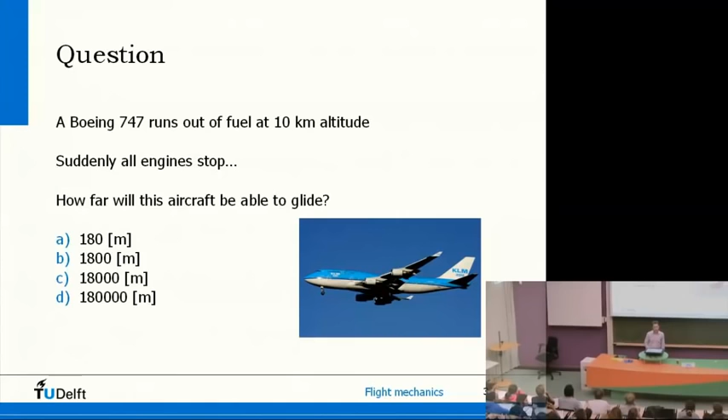Now of course you want to know what the correct answer is. I've made a picture: if this happens above Amsterdam, that circle is 180 kilometers, so answer D. That's what you can reach with this aircraft, so you can even fly almost to Brussels without engines operating.

Now, to come back to the lecture, this is typically a thing you'd like to calculate in flight mechanics. So this whole lecture is about aircraft performance: how far can you glide, like in the previous example, how fast can you fly, how slow can you fly, how high can you go, or if you want to fly from A to B, how much fuel do you need, or what's the furthest you can fly? These are typical questions you should be able to answer at the end of my lectures, hopefully, and that's for a given aircraft.

But I'll also talk a little about aircraft morphology. I'm not sure if you know what morphology means, but it's more or less related to the shape of the aircraft. So if you know how far you can glide, you can think, well, what if I change my aircraft design slightly? Would I then be able to glide further or not? So aircraft design, wingspan, etc., is really much related to aircraft performance.

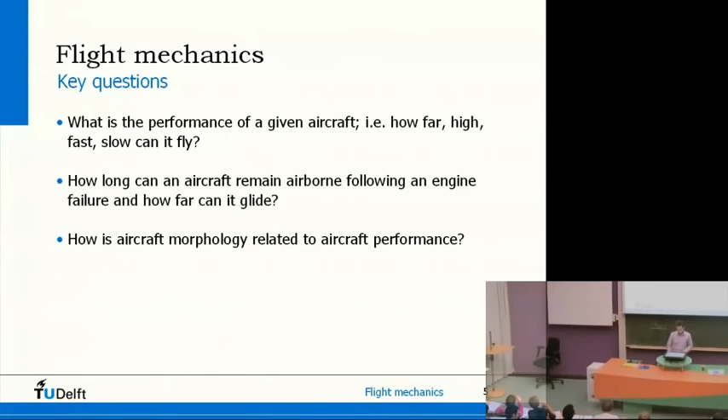So that's aircraft morphology. These are typical questions I'd like to answer, and it's important to realize that we try to analyze the performance of a complete vehicle. So it's not just aerodynamics, not just structures, not just propulsion. This deals with the whole vehicle, including the pilot, the atmosphere, and so on. So you can look at all these types of aircraft and do calculations about them.

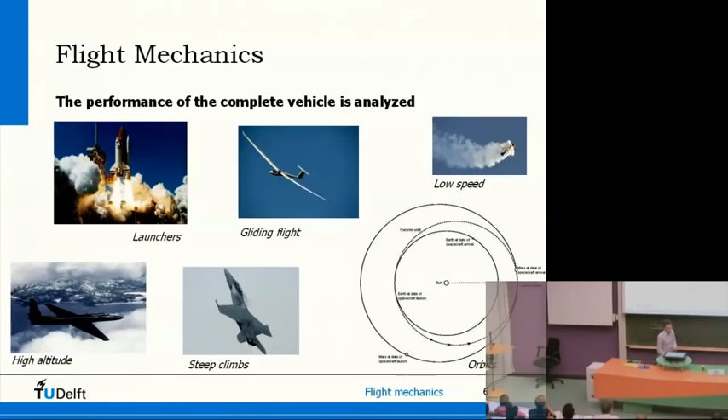And then next year there's a course on flight and orbital mechanics, where you'll even start doing calculations about orbits and space flight. I won't be telling you that because I don't know anything about space, so in this lecture series it will be only about aircraft. So we're trying to analyze the performance of the complete vehicle.

And of course, if you want to know how far it can glide or fly, you have to be able to describe the motion of the aircraft as a whole. This is why basically the center of my lecture series is about the equations of motion of an aircraft. So that's basically F equals M times A. This is what we're basically going to do, so it's not more than high school physics, really.

But of course, the forces determine the acceleration of the aircraft and thus the motion, so you have to understand all the forces that act on the aircraft. This includes propulsion, aerodynamics, the aircraft structure, in the sense that the structure will have a certain weight, and you can imagine a heavy aircraft might perform less well than a lighter one. The pilot also has an influence: the pilot can decide whether to fly high in the atmosphere or low, or what kind of strategy to use.

So this will also influence the performance. And finally, the atmosphere. Of course, at high altitude or low altitude, you have different air density, different temperature, and these parameters affect the equations of motion and thus the performance of the vehicle.

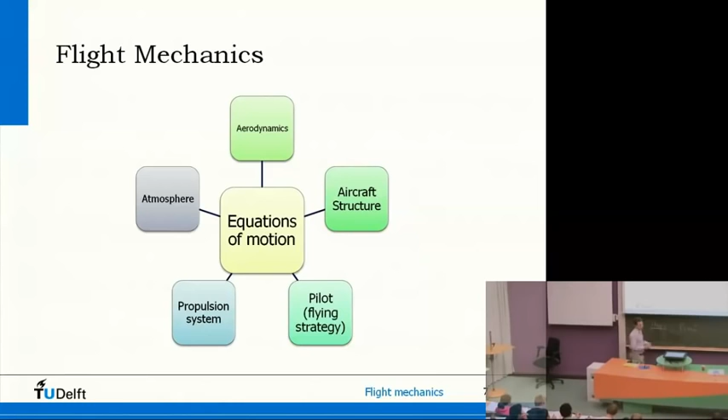So this is more or less what this whole lecture series is about. So hopefully you know now what flight mechanics is, more or less.

And before I go into details of this course, just some practical matters like what book do you need, which chapters do you need to learn. And after that I'm going to treat three things basically.

The general equations of motion, so point number 3, that's what you really should be able to do after this lecture. Points 4 and 5, propulsion and aerodynamics. They partly cover what you already know a little bit, but I'm going to extract what you know already to be able to apply it to the equations of motion.

Finally, a summary and some additional stuff for the interested reader.

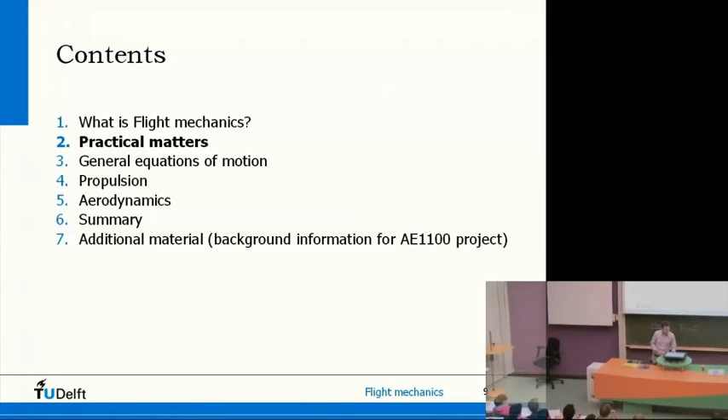So this is what I'm going to do. First lecture is more a general lecture, introduction, deriving equations of motion. And that's the tool really that we're going to use to solve all the questions that we may pose.

After that, I'm going to look at horizontal flight performance. So performance questions like how slow, how fast can I fly, what's the maximum distance I can fly if I stay at a constant altitude.

After that, it's going to be a little bit more involved. I'm going to treat climbing and descending flight, so the example I've just given, but also maybe if I want to climb to my cruise altitude, how fast, how much time does it take before I get there?

And finally, fourth lecture is the flight envelope. And the flight envelope is basically a diagram which more or less looks like this, with altitude and airspeed, and there will be some region in this flight envelope where a certain aircraft can fly.

So there will be maximum speed limits, maximum altitude, minimum speed limits. And within that region you can fly, and that's really important to the person that's operating the aircraft, because then you know what you can do with your aircraft. So this really tells you what the aircraft is able to do.

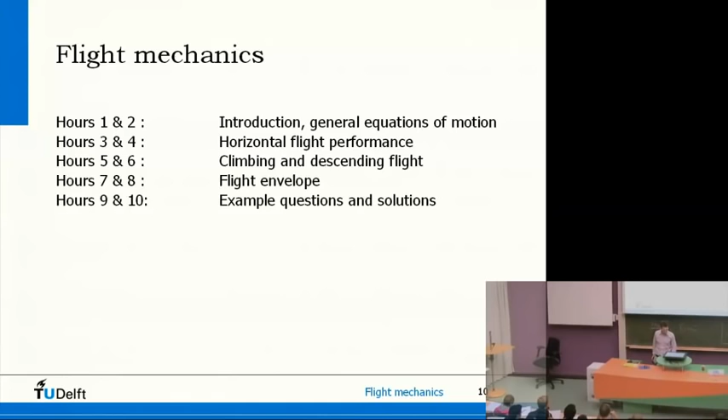Now, what do you have to learn? You have to learn the lecture sheets. If you understand the sheets that I show you in this lecture, then you know pretty much everything there is to know. There will be practice questions from previous exams on Blackboard, so you'll be able to look at them.

So you can use it as background reading, but if you understand the sheets and you make some notes during this lecture, then you should have everything you need to know.

There's also another book you could buy. It's only 14 euros. It's called Elements of Airplane Performance. It's not a waste of money because next year you'll need it anyway, so you might consider buying that. But that's up to you.

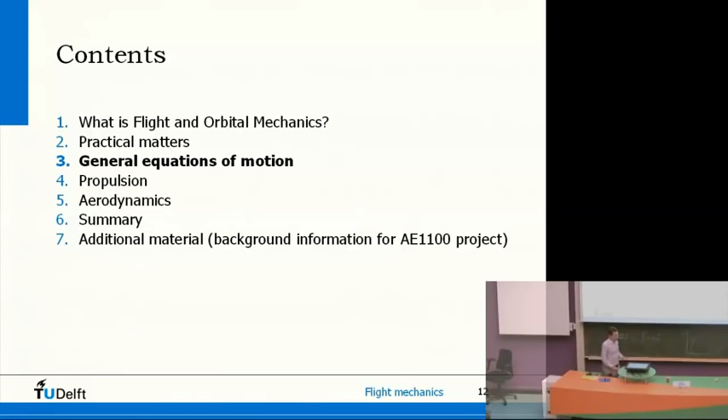I'm going to do that in a couple of steps. I'm going to talk a little bit about Newton's laws, stuff you should really already know. I'm going to talk about coordinate systems. You can imagine if an aircraft is flying through the sky, you need to define some axis systems to specify what the orientation of the plane is. Then I'm going to talk about some assumptions, to make life a little bit easier, and then we'll derive equations of motion.

Now to start with Newton's laws, this equation really only holds when you're in an inertial frame of reference. And what does that mean? That's a frame of reference, a coordinate system with axes, which is fixed in space and not moving at all. It's completely at rest.

Now, a coordinate system which is translating at a constant speed, you can prove that that's also an inertial frame of reference. To give you an example, let's say you were in a train and all the curtains are closed and the train is going at a constant speed, then except for some vibrations maybe, you don't notice at all that you're moving. So you can jump in the train and you'll land in the same spot. So that's in fact an inertial frame of reference, and the equations of motion there hold.

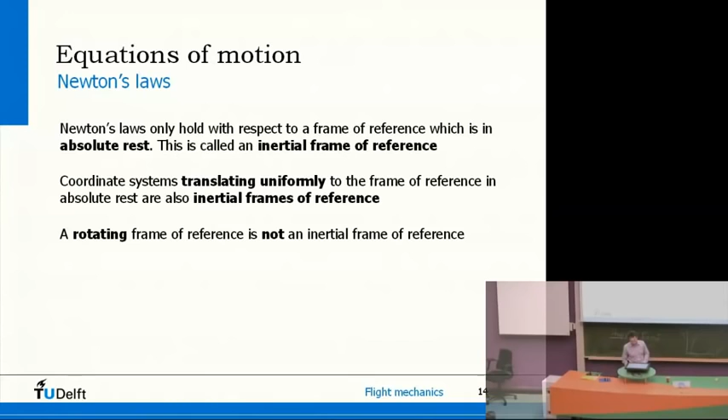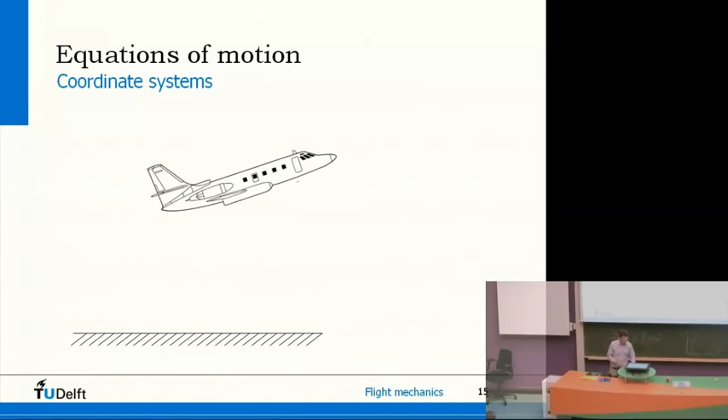Coordinate systems: there are various coordinate systems you can describe. One that's really relevant and obvious is an axis system fixed to the Earth, like here. This is what we call the Earth axis system. Out of convention, you can choose whatever direction the x-axis is located. It doesn't really matter a lot for your calculations if the aircraft is flying in that direction or another. So the x-axis, you're free to choose which direction it is.

The z-axis here is pointing to the center of the Earth. Now that's just an agreement, you could have chosen it the other way. This is the way it is, and it's completely fixed. So this system is fixed to the Earth, it's not moving.

Now, of course, the plane is moving around. So you could also say, I take this Earth axis system, the same orientation as the one fixed to the Earth, but now I fix it to the plane. So this is what we call a moving Earth axis system. It's the same axis system, same orientation, just traveling along with the plane. And that's quite convenient.

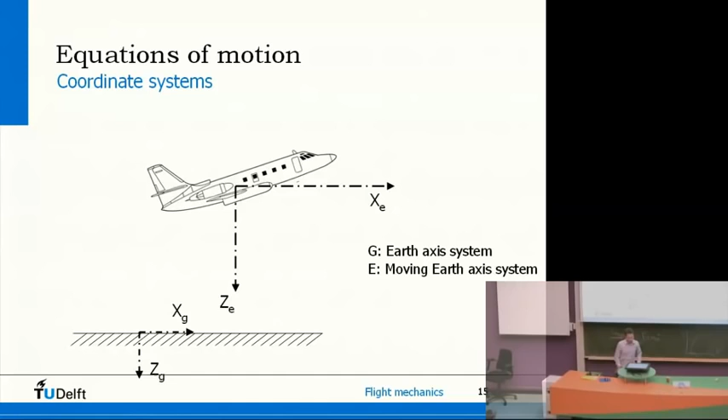Now, once you have this, you can imagine there will be other axis systems, because a plane is not always in a horizontal attitude. So we can also define what is called a body axis system. The body axis system is fixed to the plane, and the x-axis points through the nose of the aircraft. So you can see straight away that there's an angle called theta.

Let's see if this works. Oh. I'm not very good at these things.

Well, that doesn't work. So there's an angle theta between the moving Earth axis system and the body axis system. The important thing to realize is that's basically the angle between the nose of the aircraft and the horizon. So that means the pilot, if he or she looks outside the window, is actually seeing that angle theta, which is quite relevant from the pilot's perspective. Now again, the z-axis is just... why is that thing moving?

The z-axis is just perpendicular to the x-axis. Then, of course, and this is quite important to realize, there is something called the airspeed vector. And that vector indicates in which direction the plane is going. And that's interesting, because that determines the performance, where you're going.

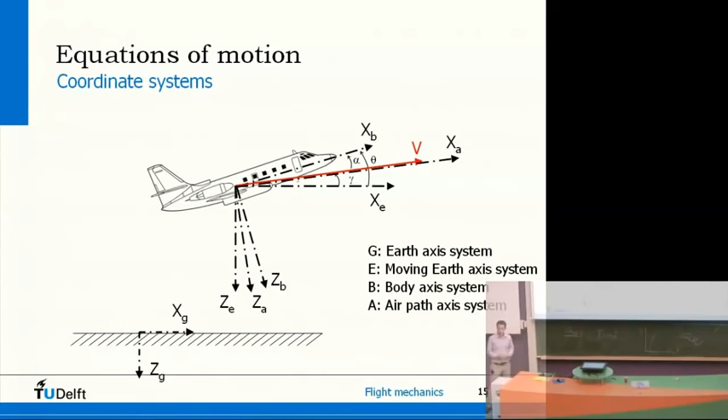And then finally, we can define an axis system, which is called the air path axis system. And this axis system is in the same direction as the airspeed vector. So we basically have three axis systems fixed to the plane and three angles describing the differences between the three axis systems.

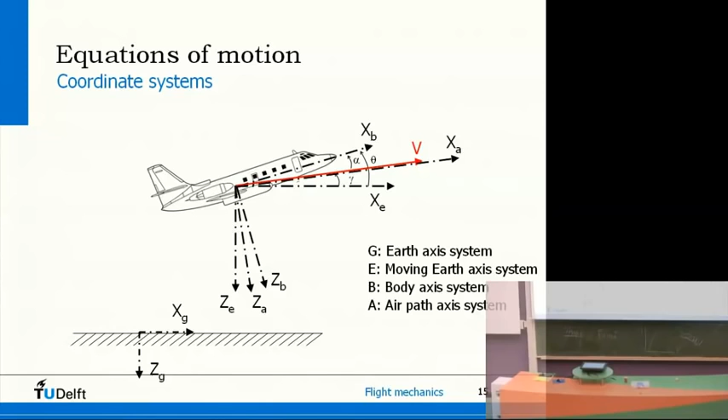Okay, so these are the coordinate systems we have. Now, these angles: theta is called pitch attitude, alpha is called angle of attack, and gamma is the flight path angle. And these angles, at least theta and gamma, they are called differently in the book Introduction to Flight. But all the other books use these notations, so that's why I'm using these as well, to avoid confusion.

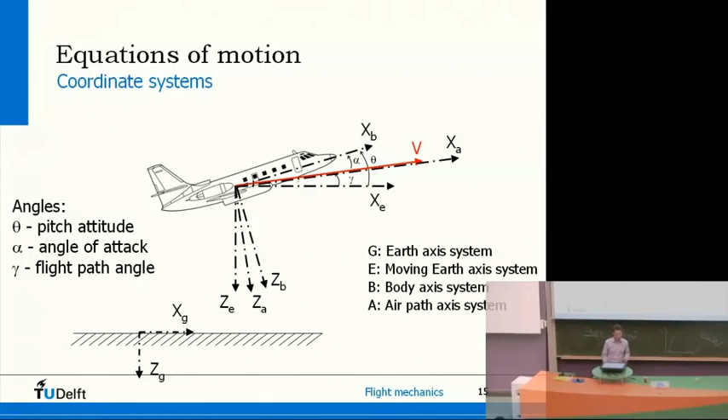Now we have all the relevant angles. And before I start deriving these equations of motion, just a few assumptions I'd like to emphasize first. The first one I assume is that the Earth is flat. Now you can see that if you would stay at a constant altitude like so, then if you fly long enough, you're actually flying around in a circle around the Earth. Now, in order to achieve a circular motion, you need a centrifugal force.

And what I'm going to assume is that the Earth is flat. And just a little calculation to show you that that is relevant. Now, the centrifugal force is basically this.

mv squared over r. Now, if you look at the top equation, in our case, m is actually the weight of the aircraft in newtons divided by the gravitational acceleration. V squared is simply how fast the plane is flying. And r, in this case, is the radius of the Earth plus the altitude of the plane above the Earth's surface. So this centrifugal force is what we call C.

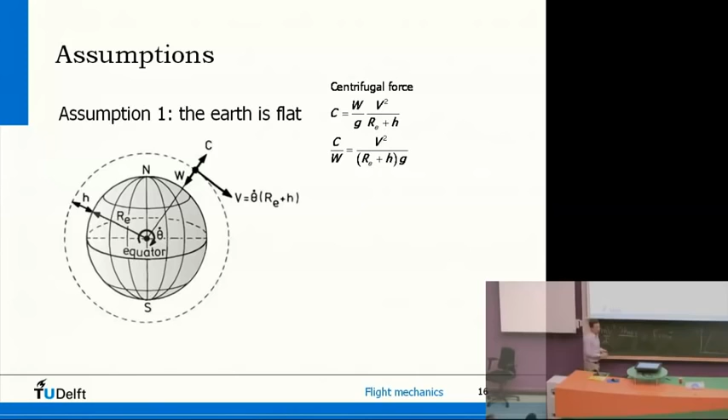Now in the second equation here, I'm showing you the relation between centrifugal force and aircraft weight, because then I can express it kind of like a percentage. And if you know the percentage, then you can say whether it's a relevant assumption to neglect this.

Now, just some numbers. This is an example. V is 100 meters per second. You can calculate how many kilometers per hour it is, but it's approximately Mach 0.3, so it's fairly slowly flying. Radius of the Earth is given. Let's say we're at 0 meters altitude. And then you can see that in this case, C divided by W is 0.00016, so 0.016%. So that's really negligible, and you can leave this out of the equation.

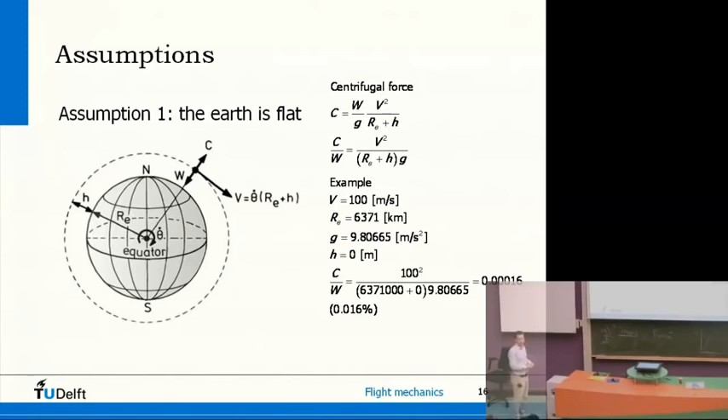Of course, if you would start flying really fast, like hypersonic flight, or maybe you start flying really high, almost into space, then this isn't negligible anymore. But the types of aircraft I'm talking about in this lecture, they fly up to 10 kilometers. They may fly supersonic, but not a whole lot. So this is really quite a good assumption.

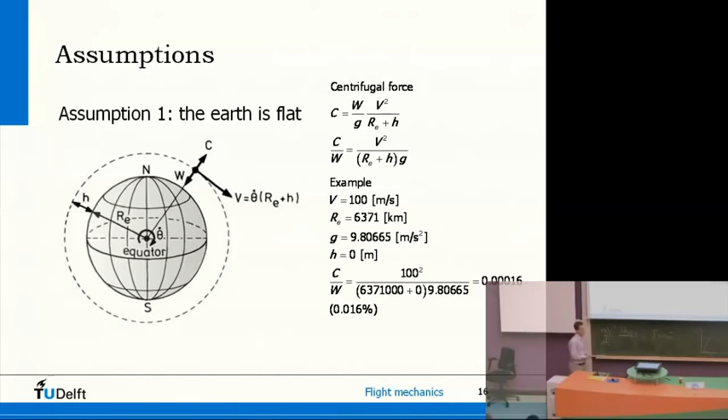Now, another assumption that I'm making is that the Earth is basically not rotating, because there are a couple of effects actually that happen if the Earth is rotating.

You can imagine if you're somewhere over here at the equator and you would move upwards, on the equator you're turning around quite fast if you just stand. And if you walk along the Earth's surface toward the north, that rotational speed becomes less.

It's kind of comparable to one of these discos where you have a dancing floor that turns around. If you're in the center and this thing is rotating, and you'd walk outside, you'd feel that the speed is increasing and you'd feel a force. So these forces are present if you consider the rotation of the Earth. That's a relevant thing, and it's actually something you can measure.

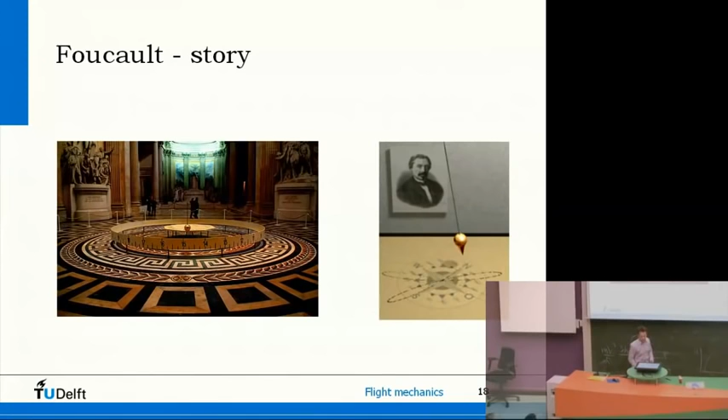In fact, this is how they proved a while ago that the Earth was rotating. Now, it takes a long time—a day before the whole cycle is complete. So you can imagine that these forces are quite small, and we can actually neglect them now. But it is something you have to pay attention to next year if you start looking at orbital mechanics and spaceflight.

Final assumption: I'm going to assume that gravitational acceleration is zero—sorry, constant. And that's in fact not completely true. If you go into space and a mass is further away from the Earth, it experiences gravity to a lesser extent. So gravity is not constant, but if you consider normal aircraft flight up to say 80 kilometers, gravitational acceleration is almost the same as at sea level. So that's a fairly relevant assumption.

Final assumption I'm making is that I'm going to treat the aircraft like a point mass—like a little ball, basically—and I'm going to see what kind of motion it will make. So these are the basic assumptions.

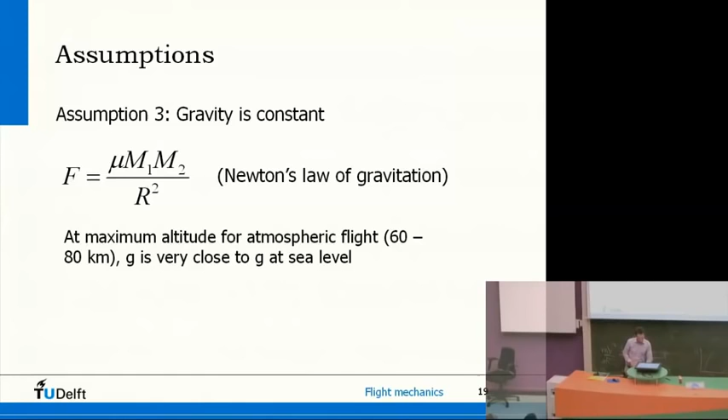Now back to our equations of motion. This is the picture I just made before. What I'm going to do now is make a free body diagram with all the forces, and a kinetic diagram with all the accelerations of the plane. Combining those will give us the equations of motion.

Let's just list which kind of forces are actually acting on the plane. Clearly there's aircraft weight, and you can imagine aircraft weight is always pointing towards the center of the Earth, so that's in the same direction as the z-axis of the moving Earth axis system. You can see straight away that these axis systems will become relevant right now. Aircraft weight, that's quite obvious, I guess.

But now let's have a look at the lift vector. Lift is by definition always perpendicular to the airspeed vector. That's something to pay attention to, because in most courses you just consider horizontal flight, and then lift is pointing upwards. But you could imagine if you're flying straight up with a fighter aircraft, then lift is actually pointing in that way. So lift is perpendicular to the airspeed, by definition, in this air path axis system—in the XA and ZA axis system.

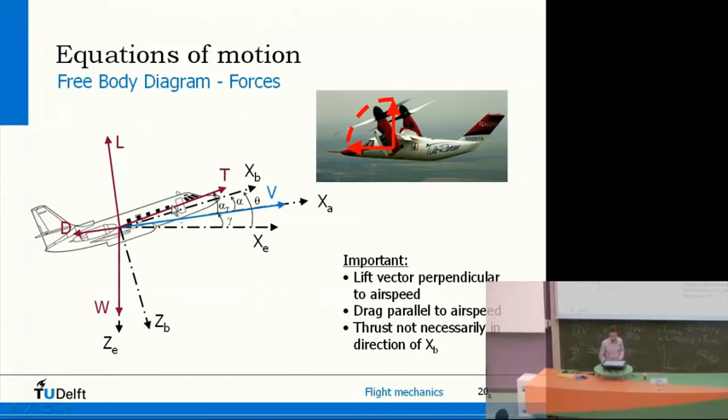So you see, we have all the forces now. Before the break, we can have a look at the accelerations as well. So the same diagram, but now we're going to look at the accelerations of the aircraft. If you can just have your attention for a few more minutes.

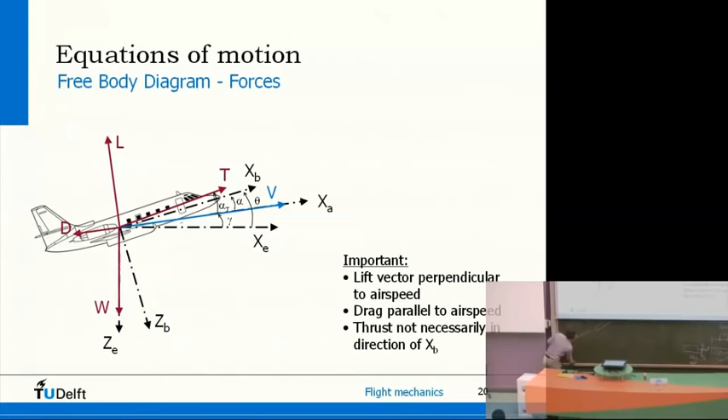There is, well, the y-axis is in fact pointing outside the board, but L is perpendicular to the airspeed vector. So, maybe I... it's basically like this. So by definition, it's okay.

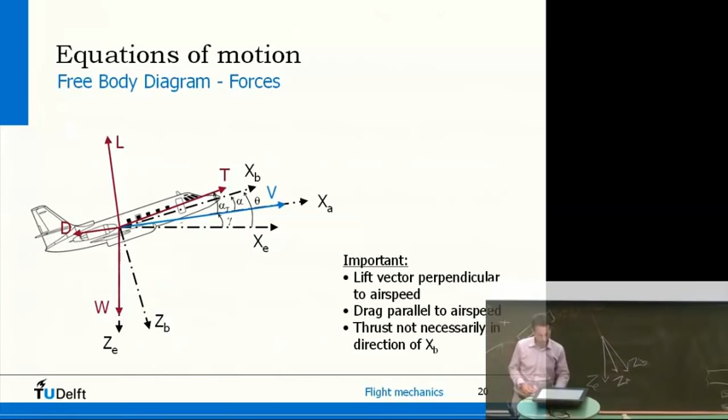Then back to the accelerations, and we're almost at where we want to be. That's the equations of motion. So I've taken forces parallel and perpendicular to the airspeed, and I'm also going to take accelerations in these two directions. Now, you can say that the airspeed may increase or decrease with time, so you may have a change of airspeed with time in the direction of v. That's a fairly simple acceleration. So if you complete the equation of motion here, you'd have mass, aircraft weight divided by gravity, times dv/dt. Now there may also be some kind of a vertical acceleration.

And you know that if you have an acceleration perpendicular to the speed vector, then you will start to go in a circular motion. Basically, if you're in a car and you're driving straight and you make a force to the right, then you start to go in a turn to the right, really simply. So you can imagine there may also be a vertical acceleration of the plane, and such a vertical acceleration will make the plane go in a circular motion like this.

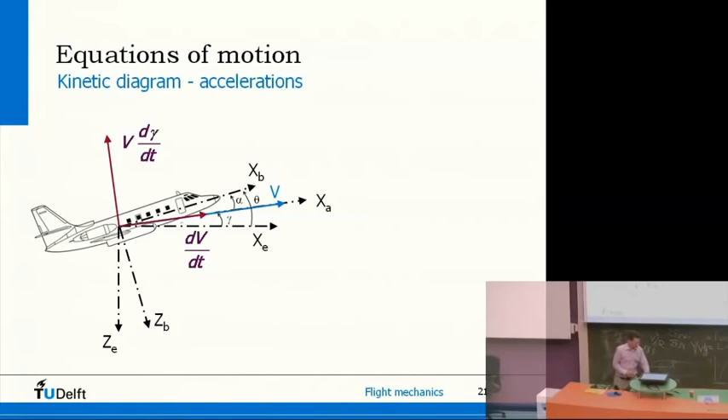So the equations of motion then become this. So we have a vertical acceleration times the mass, and then we end up with these two equations. So we have one plane, it's able to move in two directions, two-dimensional space. We're treating it basically like one mass which is moving around. So we end up with two equations of motion that describe what the aircraft is doing.

So that's all for this hour. In the next hour I'm going to look at what are actually all the forces in these equations and how do they behave.

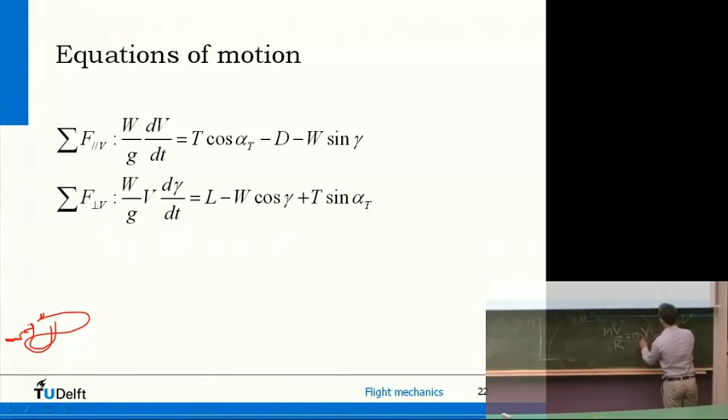is V. And if you would look at the traditional centrifugal acceleration, which is mv squared over R, and I put this in the equation, so I replace one of the v's with d gamma dt R, I get R divided by R. So this is the same as mv d gamma dt. So I hope it's a bit clearer, but that's basically what you see on the left hand side in the second equation. So it's the centrifugal acceleration, but the only reason I write it down like this, without the radius, is because I already have a flight path angle in the equation, so I don't want to add another variable, which is the radius.

So much for equations of motion. Now, you've seen in these equations of motion, there are a couple of forces that are quite important. There's the thrust, there's the lift, drag, and the aircraft weight. Those are the four basic forces. Now, aircraft weight in the things I discuss is more or less constant. Of course, if you burn fuel, then an aircraft may become lighter. In fact, if you fly for 8 hours on the way to China, then aircraft weight might actually reduce by about 40%. But in this lecture, I'm not going to treat that.

Most important forces to discuss are propulsion and aerodynamics. So these are the two topics I'd like to discuss in this hour. And what you see in these equations is I'm talking about real thrust, real drag, real lift. So not a lift coefficient, not a drag coefficient. I really want to know what these forces are.

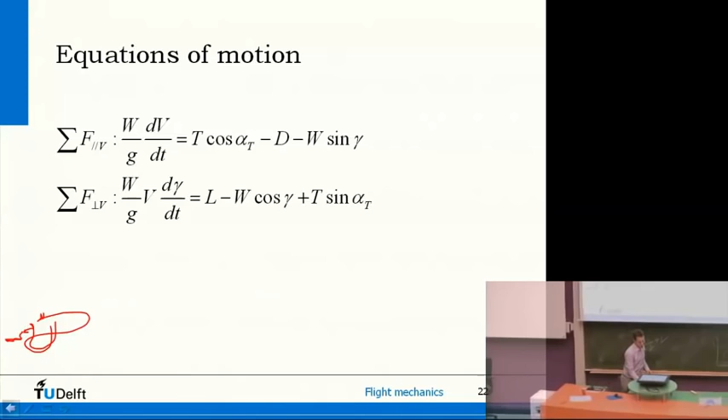I'm going to look at some equations you should already have seen in this lecture or in previous lectures of Introduction to Aerospace Engineering. But I'm going to change them a little bit and highlight what you need for this lecture. Some of the things you've already seen, but it's just a refresher, changed to apply it in the equations of motion.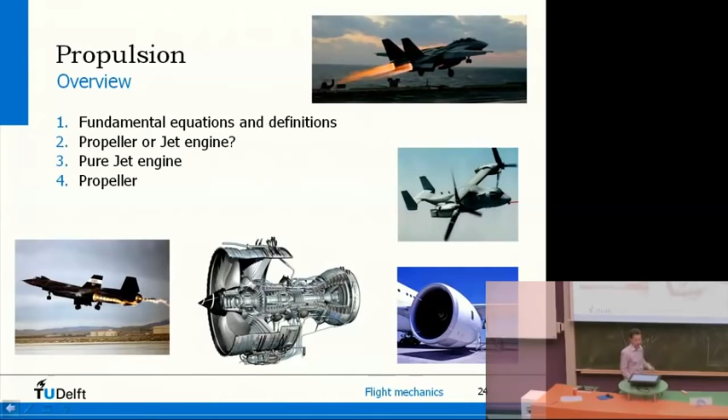The most fundamental thing is to realize that if you have a propulsion system, no matter which one you have, they all work in the same way. They all somehow take a bit of air and accelerate it. By accelerating air, you create a force through the momentum equation. Basically, the momentum of the mass flow of the air at the exit of the engine compared to the momentum at the entrance - the difference between the two is the force that is created.

One important thing here is that when I talk about mass, it's actually a mass flow, so the units are kilograms per second. I could have put a dot on top of it, but it's a mass flow. I is, well maybe in Dutch you'd call it impulse, but in English it's momentum - so it's mass flow multiplied with V. Momentum would be mass times v, and the derivative with time is what you have here.

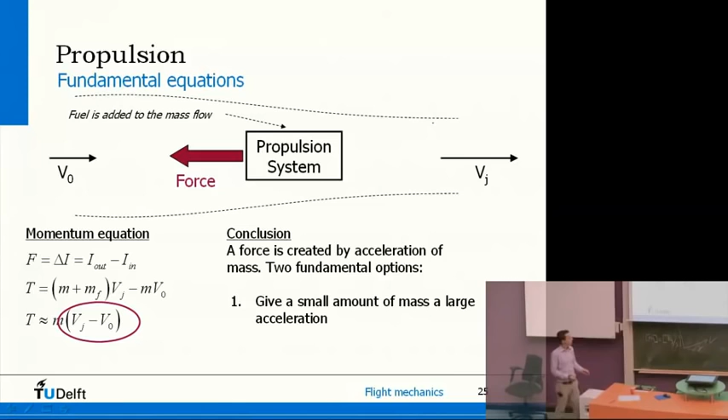So really two variables you have, because V0 is the speed at which you're flying. If you design a propulsion system, you can play with this jet velocity or with the mass flow of the air. So you have two options to create the same amount of thrust. You could take a little bit of air and accelerate it a lot - playing with the jet velocity. Or you could take a lot of air and give it a little push, and get the same amount of thrust. So you can take a lot of mass with little acceleration, or a little mass with a large acceleration, or anything in between. That's really the difference between all these types of propulsion systems - important to keep in the back of your head.

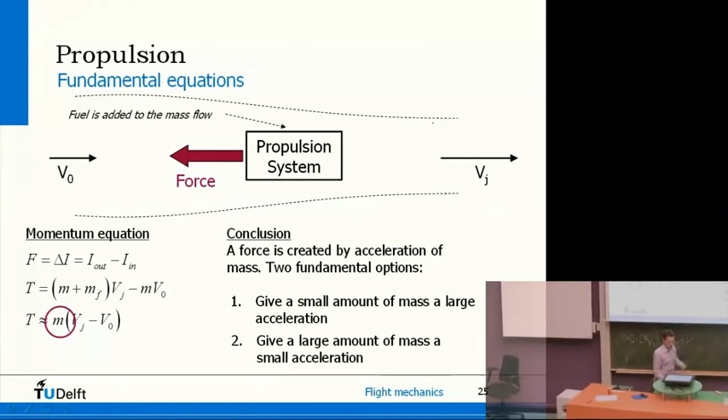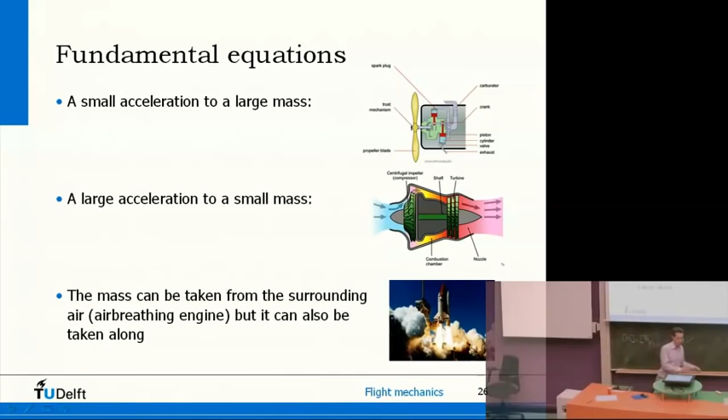Just to give you some examples: on top you see a propeller with a simple combustion engine like in general aviation aircraft, and that propeller is actually accelerating a large mass of air just a little bit. Compare that to a jet engine - you know a jet engine makes a lot of noise, and that's basically because the air at the exit has a very large velocity. So a jet engine gives a very large acceleration to a relatively small mass of air. Finally, not really the topic of this lecture, but you could also take the mass with you in a rocket, and then you can also create a force.

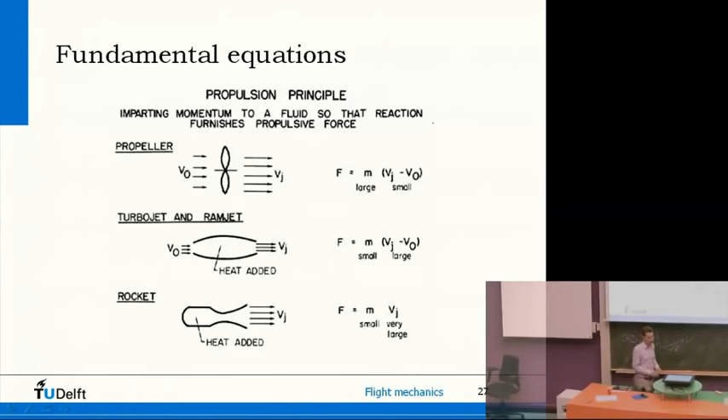So, if you look back at the equation, for the propeller you have large mass flow, small speed difference, and for the jet you have a small mass flow and a relatively large speed difference.

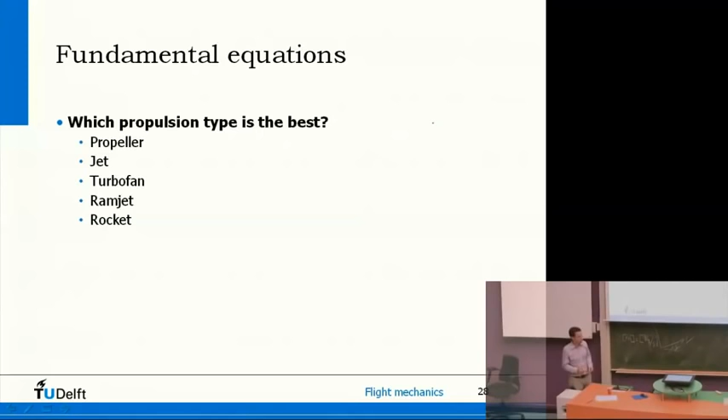But then you might wonder, which propulsion type is actually the best? A propeller, maybe a pure jet like you have on fighter aircraft, maybe a turbofan, which is a bit in between a pure jet and a propeller like you see in civil aircraft, maybe a ramjet, that's more a special case, or a rocket.

But before you can answer that question, you have to say, if you want to define what's best, we have to define what do I mean with best? Do I mean a lot of thrust or a very efficient engine? So we have to make some definitions first before we can compare different types of engines.

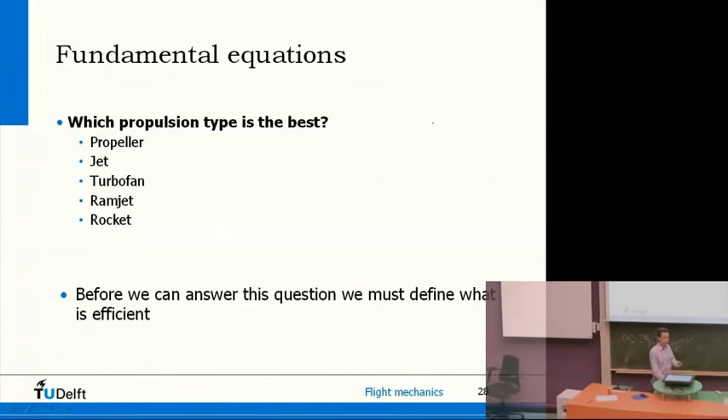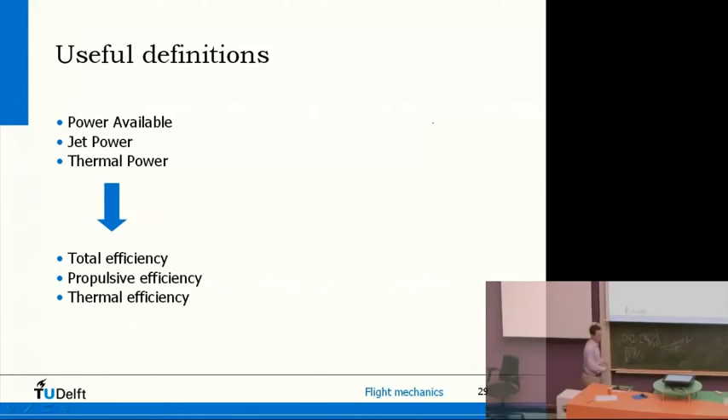So we're going to look at two definitions. We're going to look at power, basically energy per second, and we're going to look at efficiency, which we express in terms of a percentage. We're going to look at a couple of powers, and I think 2 out of the 3 you've already seen, and a couple of efficiencies. With these efficiencies, we'll be able to compare different engines.

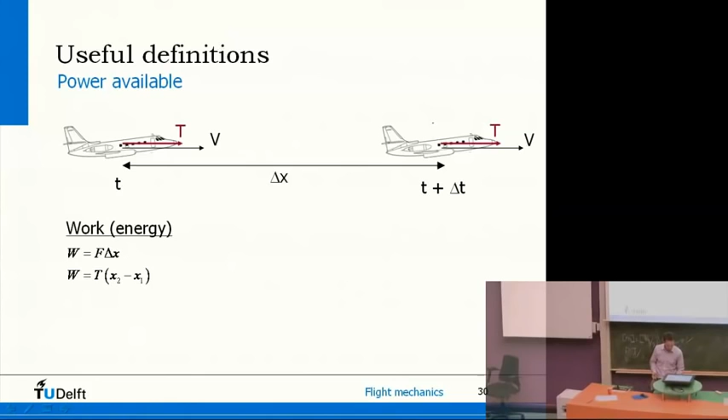Now, I'm not really interested in the energy. I want to know what is the power that I need. And power is energy per second. Was it a bit too loud? I can talk softly as well. So, energy per second, very simple.

Power then is work divided, so energy divided by the amount of time that it takes. Now, you have thrust times delta x, which is the work, the energy, and you have time delta t, and you can see straight away delta x over delta t. If you make the delta small enough, you'll get the change of distance with time, which is airspeed. So this power is what we call power available, because it allows us to go from A to B, the power you have for transportation. So this is the most interesting thing. Power available is thrust times velocity.

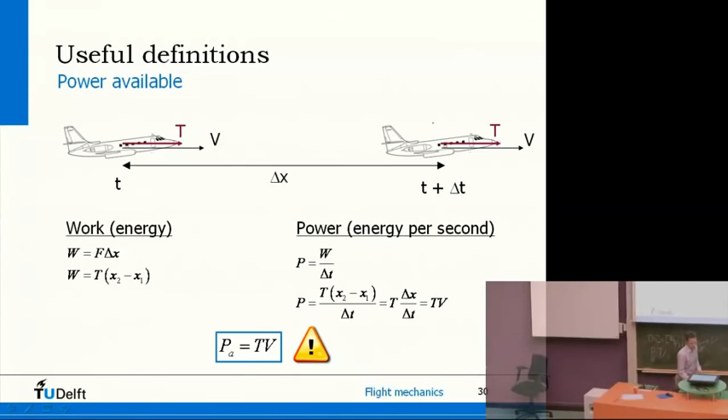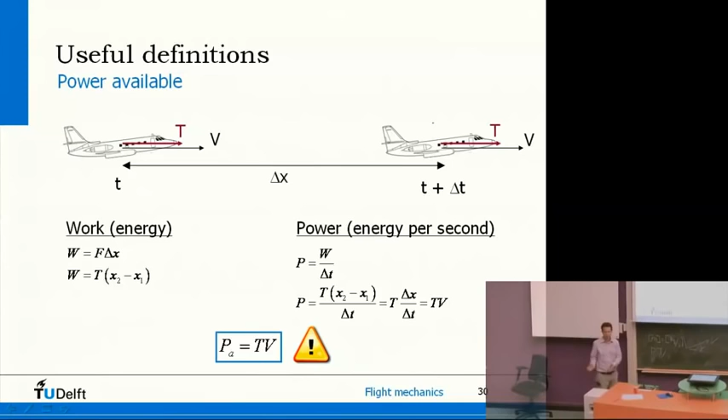Of course, there are some other powers you can define, because remember we're accelerating mass in order to get a thrust force. So you can imagine that there is a change in the kinetic energy of the air. So we can also define something called jet power, and that's basically the change of kinetic energy of the flow. If you look at the front of the engine, kinetic energy would be half m v squared, and at the end of the engine it will be half m vj squared. Now, as I said before, m is kilograms per second, so m there is a mass flow, so that's basically energy per second you see there. So it's a change of kinetic energy per second. Pretty straightforward, and that's what we call jet power.

Now that's an important one, because you can imagine that after the plane has passed, the air is moving backwards. You've accelerated it, so you're losing energy in the air, and that will basically affect the performance.

Was there a question? You can use, yeah, still working. Was there a question? No?

Now, of course, I've talked about jet power, so energy left in the air. I've talked about power to go from A to B, that's the interesting part for the person flying it. But of course, this energy has to come from somewhere, and it comes, of course, from the fuel, from burning fuel.

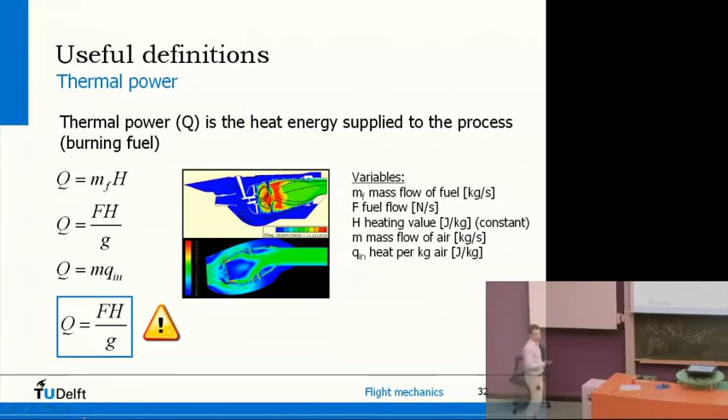But now let's have a look at efficiency. I'm going to define total efficiency as power available divided by thermal power. Because power available is that power related to flying from A to B, and Q, thermal power, is basically the amount of fuel you need. So this total efficiency just tells you, okay, if I go from A to B, I need a certain amount of fuel, and it tells you how efficient you transfer the fuel into transportation.

Now, you can understand that if you take jet power divided by jet power, that's equal to 1. So in the second equation, I've multiplied total efficiency with 1, jet power divided by jet power, and then I've rewritten it slightly: power available divided by jet power multiplied with jet power divided by thermal power.

And if I do that, then I can make a distinction in efficiency. I can say, well, total efficiency is then power available divided by jet power, which is something we call propulsive efficiency, multiplied with jet power divided by thermal power, which we call thermal efficiency. So I just made a distinction between two efficiencies.

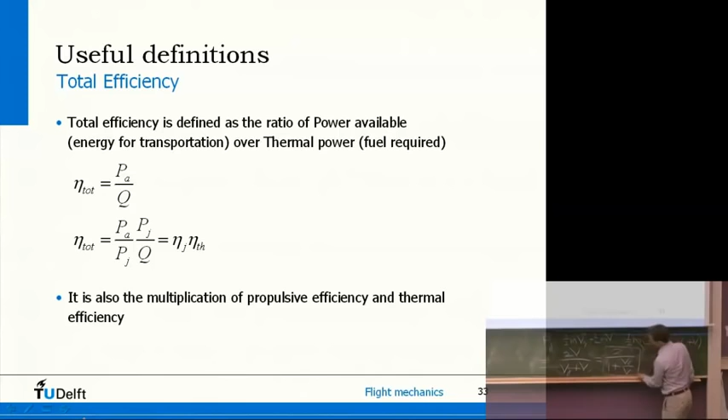Now, clearly these masses disappear. Now I have here Vj minus V, Vj minus V, so these two terms disappear. So I end up with propulsive efficiency being, I hope it's readable, 2V divided by Vj plus V, and I can also write this as 2 divided by 1 plus Vj over V - in this final step, I'm dividing the top and the bottom by V. So this is an expression for the propulsive efficiency, just a function of jet velocity and the speed at which the aircraft is flying.

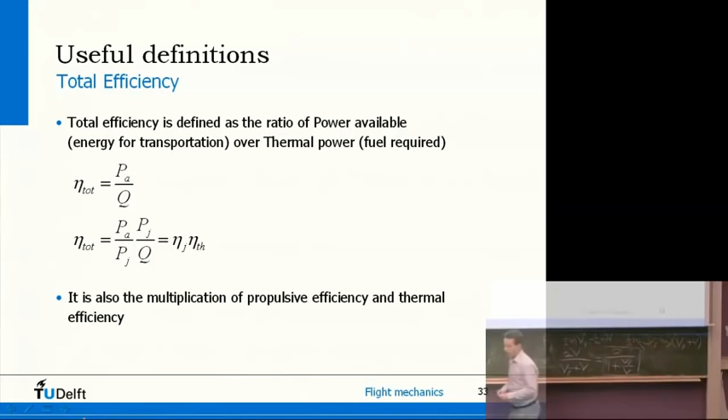Okay, now if you take that equation, then if Vj is equal to V, then you would find that propulsive efficiency is 1, which is 100%, which is good.

But, of course, thrust is basically mass flow times the change in velocity. So if you start creating thrust, the jet velocity will be higher than the airspeed, and therefore this eta j, which depends on these two terms, will always be smaller than 1. So in order to transport yourself, you have to accelerate air, which means you leave energy in the air, which means the efficiency of your system is always smaller than 100%. So you cannot transfer all the fuel energy into transportation because you leave energy in the atmosphere.

So if you look at this, then you see this efficiency is actually dropping as the ratio between jet velocity and airspeed becomes larger. So a large acceleration of the mass leads to a lower efficiency.

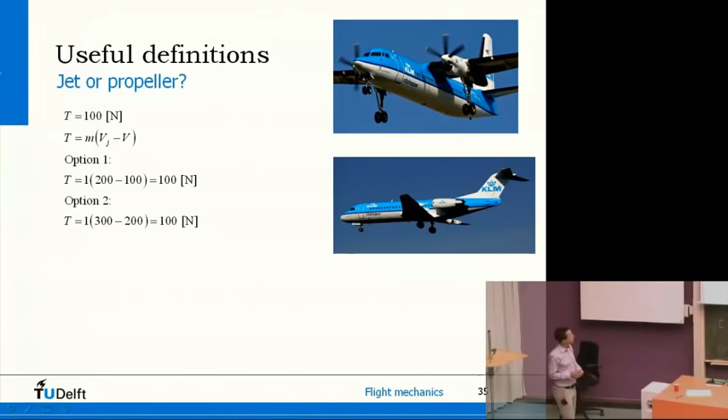In this example, I'm going to create 100 newtons of thrust, but I'm creating it at two different airspeeds. In option 1, I'm flying 100 meters per second, and in option 2, I'm flying 200 meters per second. Let's keep the mass flow the same: 1 kilogram of air per second goes through the engine. I'm giving the air the same acceleration, an increase of 100 meters per second, and in both cases I get 100 newtons of thrust.

You can see immediately that the thrust is identical in both cases, but this ratio of Vj over V is not the same, because in one case it's basically 200 divided by 100, which is 2. In the second case it's 300 divided by 200, which is 1.5. So if you look at the first option, the propulsive efficiency, if you type in the numbers, is only 66%. In the second option, propulsive efficiency is in fact 80%. So if you give the same acceleration to a bit of air at a higher airspeed, the second option, you end up with a better efficiency.

So that's maybe a little curious, but this means if you fly faster, it makes sense to accelerate the air because you get more efficient. This is why if you look back at this equation, thrust is mass flow times the speed increase. As said in the beginning, you can do two things: take a large portion of air and give it a little push, or a small portion of air and a large push. If you fly fast, it makes sense to play with this acceleration, so a jet engine becomes more efficient.

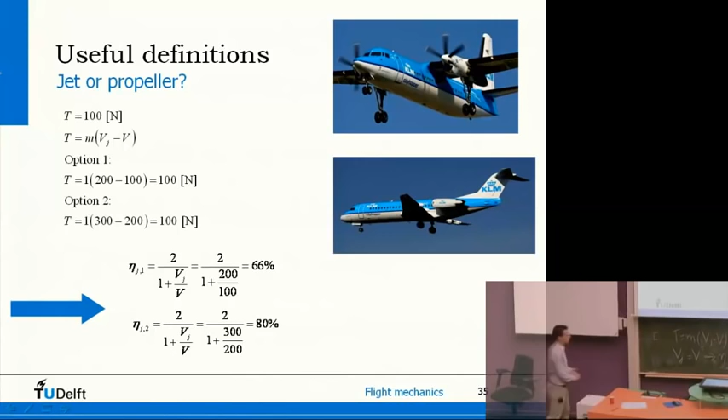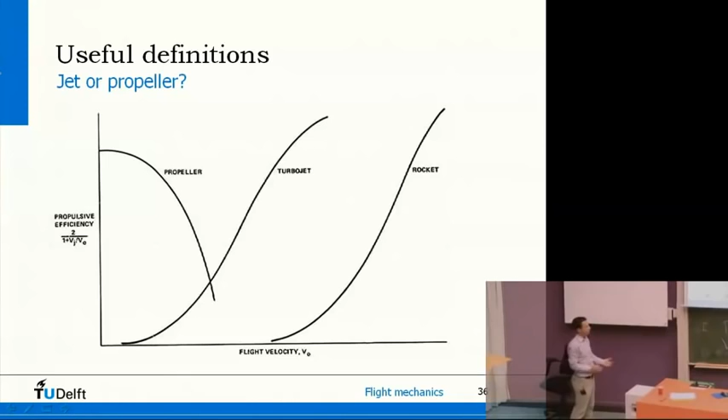This is why you see that the question of whether you need a jet or a propeller isn't that a propeller is worse than a jet. In fact, even though it may look older, a propeller is better at lower speeds and a jet engine is better at higher speeds. So for each speed at which you're flying, there is a certain propulsion system which is most efficient. At low speeds you might want to use a propeller, at high speeds you might want to use a jet, and at even higher speeds you might want to start using things like a rocket or a ramjet or other exotic propulsion types. So there's no single answer to the question.

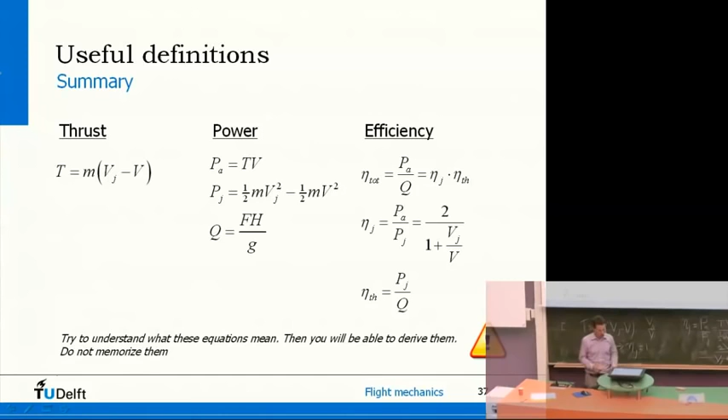But what I talked about so far is propulsion systems in general. Let's now look at two different types of propulsion systems and how they actually behave: a jet engine, which is one case I'm going to treat, and a propeller engine as the other option.

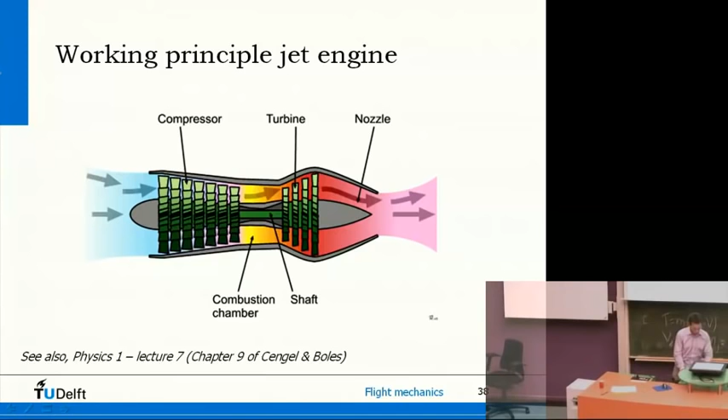Now, just summarizing: at the intake, the air comes to a standstill in front of the engine, which makes the air pressure increase a little bit. But that compression at the intake is quite low, maybe pressure increases by 50%, but it's negligible compared to what happens inside the engine.

Inside the engine, the compressor makes the compression ratio up to a factor of 30 or 40, and the jet velocity at the end is very high. This jet velocity really depends on what happens inside the engine, because there the air gets compressed a lot, and the engine doesn't really sense that much what happens in front of it.

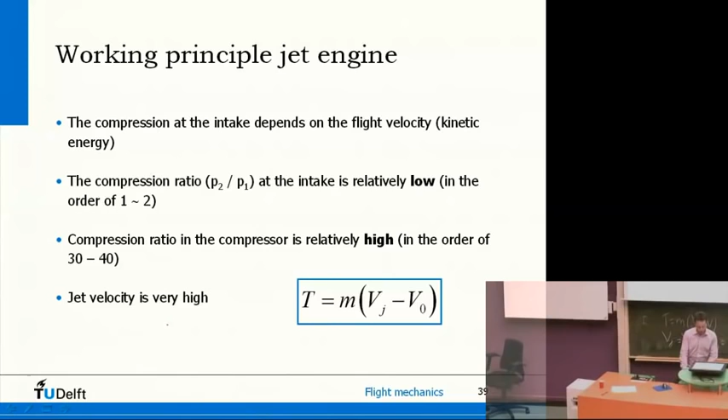Of course, if you go faster there's a slightly different mass flow, and the compression in front of the engine is a little bit different, but overall it's pretty much a straight line. You could make this diagram for a lot of jet engines, and they all look more or less the same.

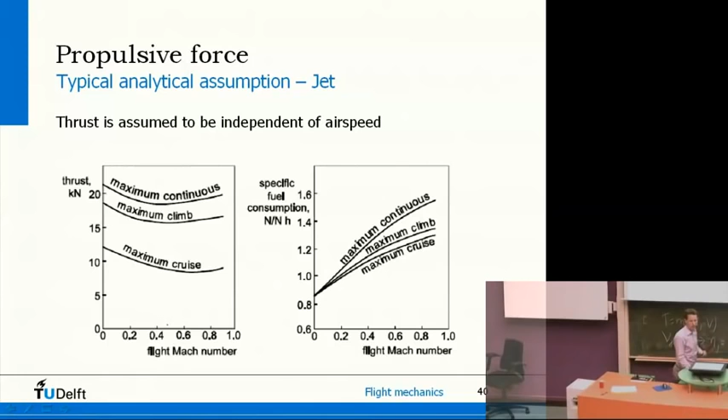If you take this thing and simplify it for our flight mechanics lecture, what you can assume is that thrust for a jet engine is more or less independent of airspeed. Of course, if you give more fuel flow in the cockpit you get more thrust, and less fuel flow gives less thrust. But if you don't change anything and just fly faster, you don't really notice it in terms of thrust.

This is a nice thing to have, because thrust is something we need in our equations of motion. Now that's the jet engine. Let's have a look at propeller aircraft.

Basically what I want to do is end up with a similar graph, but for propeller engines. If we have those two, then we have the most important propulsion systems which we can apply in flight mechanics.

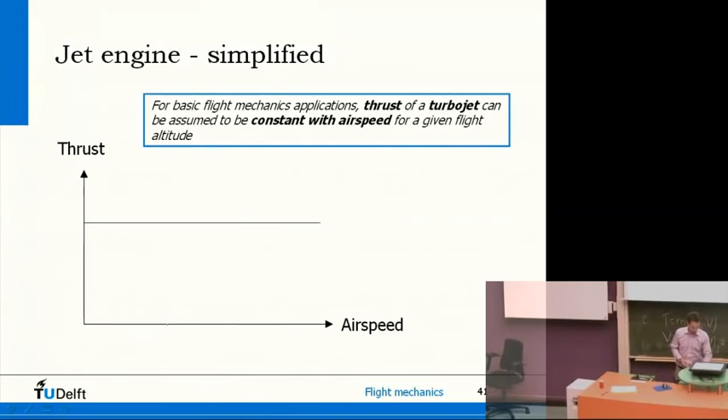You have this high pressure gas in the combustion chamber, which tries to expand. It's very warm, it goes through the turbine, but in a turboprop you have a larger turbine. So instead of letting the air out at the end at high velocity, you use that energy still left in the air to drive the propeller.

There's a shaft going to the propeller. There might be a gearbox to make the propeller rotate at the appropriate speed. But basically, all the energy is used to drive the propeller instead of accelerating the air.

If you look at the airspeed at the intake of the gas turbine and at the exit, they're more or less the same. But the propeller is rotating, and the propeller is the device that's actually accelerating the air and creating thrust.

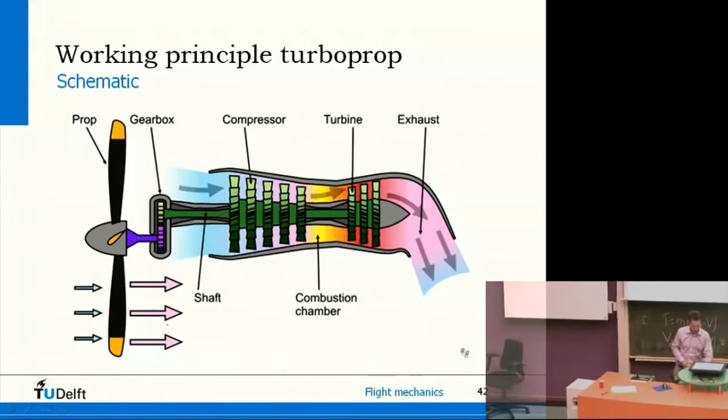So, of course, what you would see then, if you consider a propeller, is that in front of the propeller there's a certain airspeed, and since the propeller is rotating, it's actually accelerating the air backwards. But how does that actually work in detail?

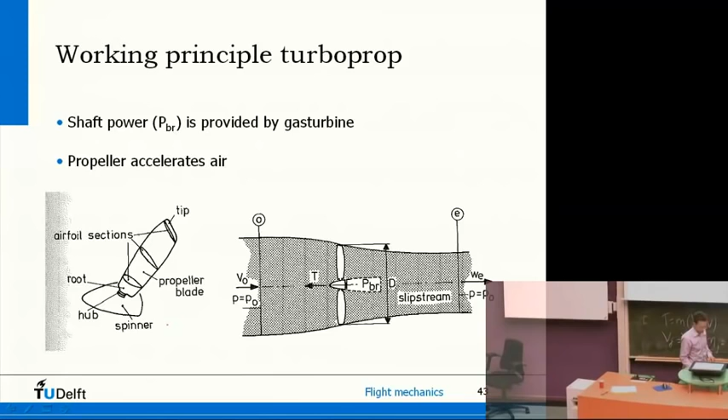Now this is a picture you have to look at for a couple of minutes maybe. If you consider a propeller blade, it's actually quite similar to an aircraft wing. If you make a cross section like it's done over there, that cross section is in fact

just an airfoil like on a wing. So if you look at that cross section, it's actually traveling at a very high speed just because the propeller is rotating. So this cross section has a large speed due to the rotation.

Now, of course, the propeller as a whole is also traveling forward, which is V0. So the cross section sees the combination of these two velocities. Omega r and V together give some kind of total velocity. And the angle between the actual cross section and the total velocity is then the angle of attack of the blade section. The angle with the horizon is what we call beta, and that's simply how you design the propeller - that's a geometrical thing, an angle you've given the cross section.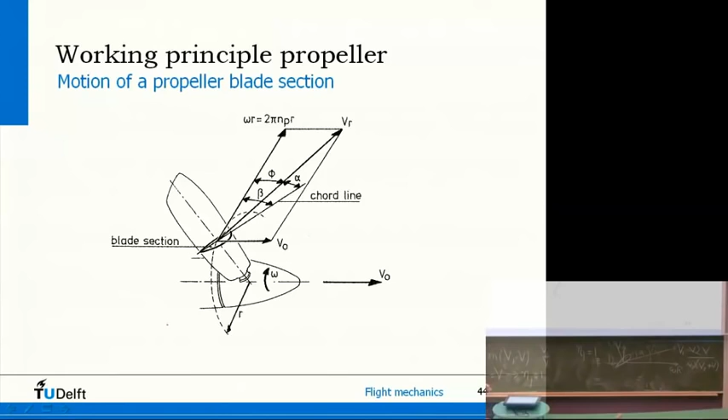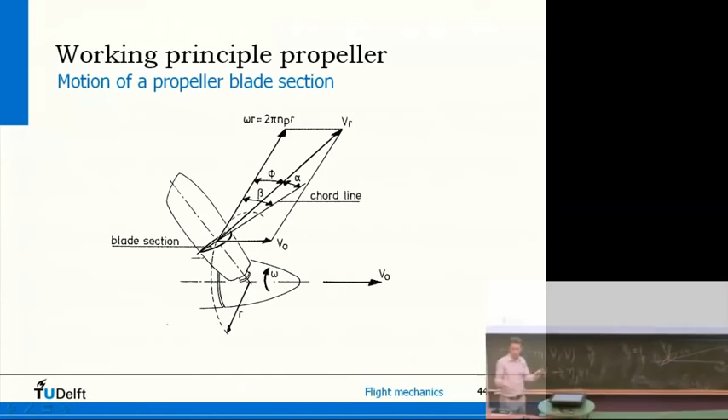Is there a question? Yes, good question. The question is, does this blade have to have different geometry at the outside or the inside? It does, because omega r - omega is how fast the propeller is rotating, and r is the radius - the angle of attack depends on the radius. So if you're at the tip of the blade, you have a different r, so a different angle of attack. That's why propeller blades are curved like this, in order to have the same angle of attack along the whole propeller.

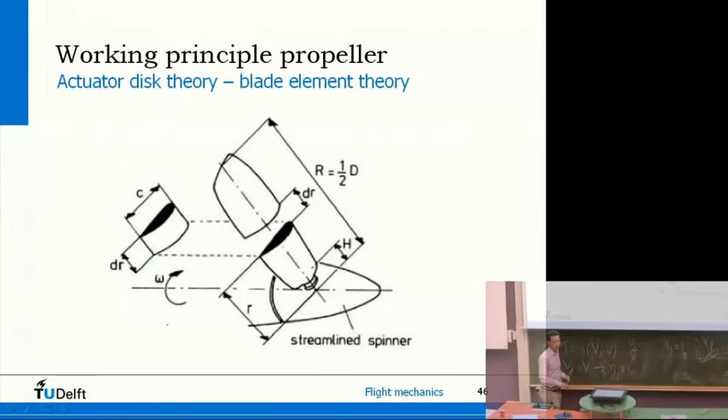Skip this. One thing you have to be aware of - I just need 2 more minutes I think - is that this picture I've drawn here isn't completely true, because the air is actually accelerated through the disc. So the airflow at the disc of the propeller is a bit higher than the actual airspeed of the vehicle.

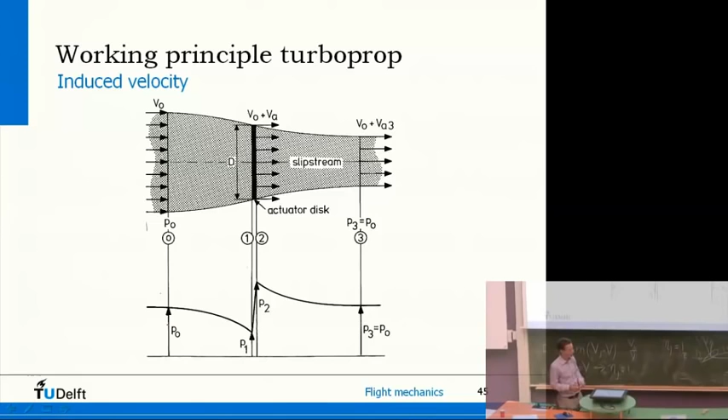If you make the full picture - and I'm not saying you have to do this yourself, this is just for information - there is an additional velocity, Vi, because air is going a bit faster through the propeller, so this affects the angle of attack a little bit. But we don't really need that now. All we need to know is that the geometric angle of the profile affects basically the angle of attack of the local blade section, and therefore affects the lift and the drag.

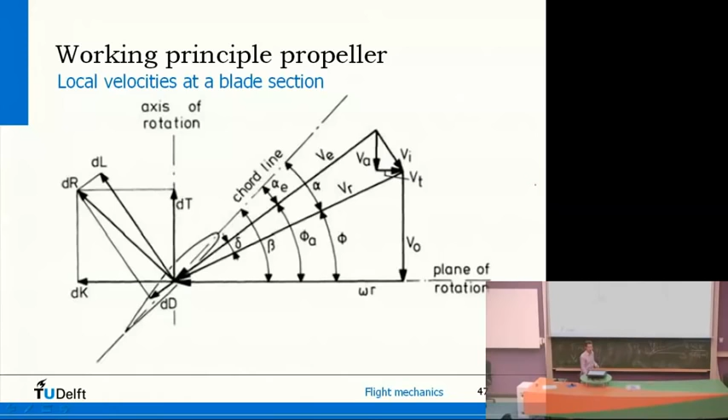So you can imagine that since the forward velocity also affects the angle of attack, maybe if you fly faster it would be nice if you could change the pitch, or this angle of the blade. Just need 1 more minute, so be patient. If you see a propeller operating at takeoff, so no speed, you could have a different attitude of the propeller compared to when you're flying forward, in order to have the same angle of attack.

So most propellers of turboprop planes can actually change the pitch of the blades during flight. If they go faster, they change the blade angle. Maybe if they have an engine failure, you could put it such that it doesn't create that much drag, so you can glide well. And actually when you're landing, you could actually make reverse thrust with a propeller. So this is a nice feature.

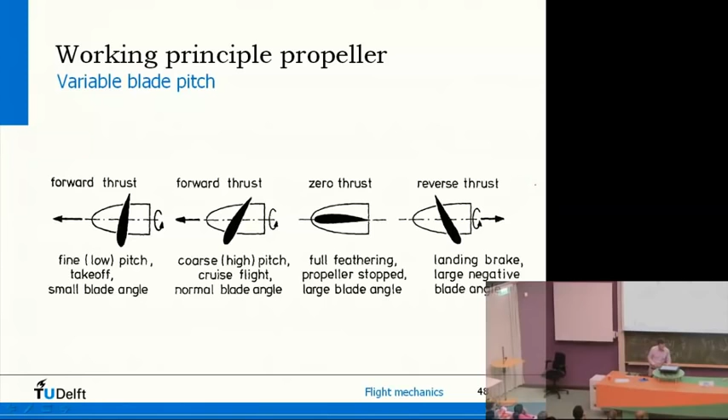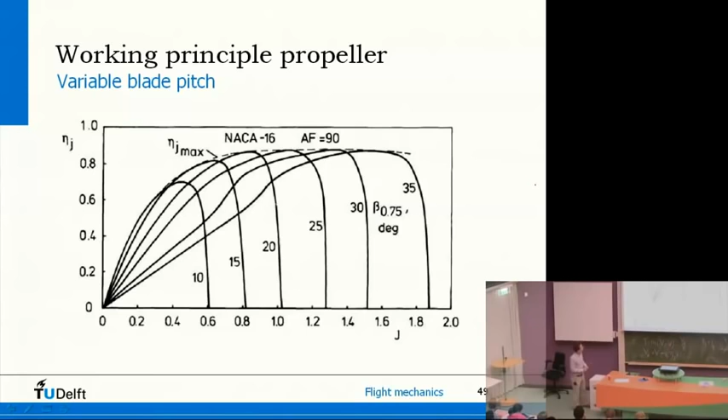And because of this, if you make a picture of the efficiency of the propeller as a function of J, and J...